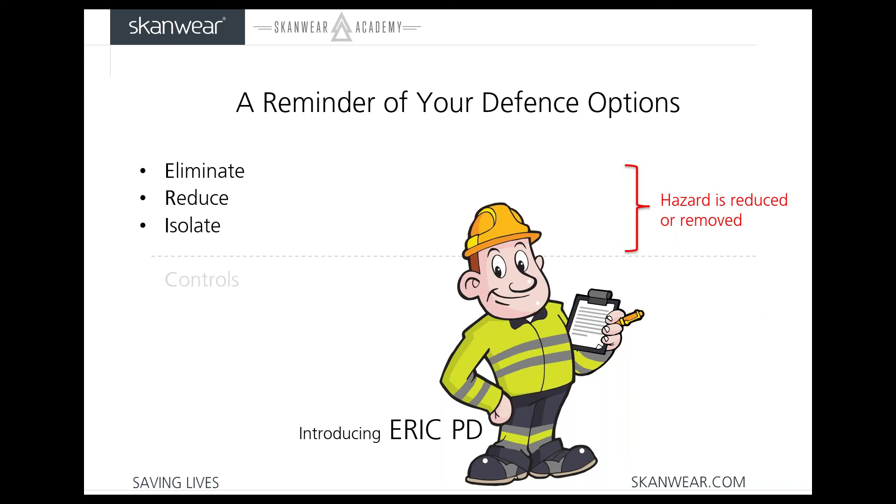And there's lots of evidence around to show that an association helps people remember, and having a mascot around the site is always a good reminder to people: hey, don't forget your hierarchy of controls. So ERIC PD stands for Eliminate, Reduce, Isolate, Control, PPE and Discipline. So there you are, ERIC PD.

Yeah, and it's really important to stick to that hierarchy of controls when considering the hazards, as it acts as a reminder of your defences. I think it's all too easy to get sucked straight into PPE, safe systems of work and training, but it's just clearly not the best way forward. Absolutely true. The higher the control, the stronger and more reliable that control is. So preferably, wherever reasonably practical, we have to use these measures.

The reason that the first three are more effective is because they're examples of safe place strategies, whereas the last three are safe person strategies. So let's quickly run through ERIC PD starting from the top. So E is to eliminate, where the job is redesigned so as to remove the hazard completely. It's usually started at the design phase of the project by providing the proper technology.

So if hazard elimination is not successful or practicable, then the next control measure is reduce or substitute. And a good example would be to reduce the incident energy exposure. So we measure the voltage or the current further downstream where there's less energy available.

And if there's no suitable practical replacement or substitution, then the next control measure is isolation. And this is simply, as the name says, physically separating the hazard from the operator or introducing engineering controls using additional machinery. And with electricity, for argument's sake, we could actually introduce remote switching.

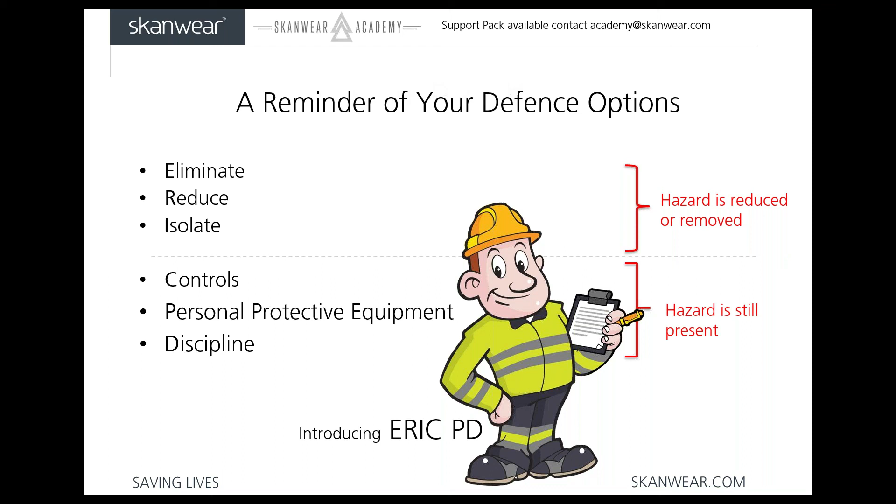So now you might be wondering, why should I bother? In the last Academy session, we showed the devastating effects an arc flash can have as we watched the survivor video of Donnie Johnson, who almost died in an arc flash blast. Yeah, that's right, Lorna. The injuries can be life-changing, both physically and mentally, and the healing time can be months, even years. So, to recap very briefly the effects of an arc flash.

An arc flash is an event, it really is a violent event that can cause destruction of the equipment it is involved in, fire, injury, death, not only to the worker, but to anyone else who's standing nearby. So what we have is a fireball with temperatures of 19,500 degrees, which will burn 10 feet away. And remember, it rolls around you. It's a 360 experience. It's not just coming at you from the front.

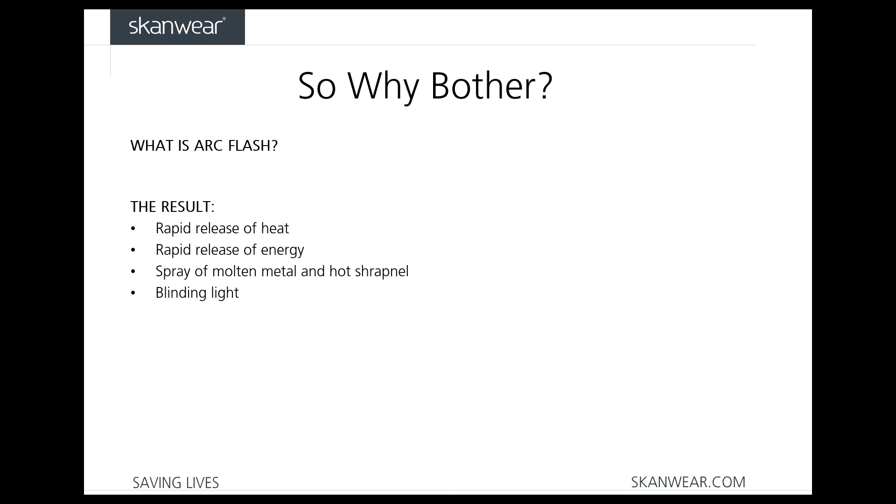And then we have the ejection, a plasma ball of copper vapor and droplets, hot shrapnel, for example, bolt heads and rivets. And then we have the intense bright light, hence the importance of the visor to block the UV light. The blast is upwards of 2,000 pounds a square foot, and it will definitely blow you off your feet. And if you happen to be on a ladder, it will blow you off the ladder. Absolutely no doubt about it.

And the noise, again, it's got 140 decibels. It's like standing next to a gun going off. And the resultant outcome of that is second and third degree burns, vaporization of digits, amputation of hands and fingers, blindness, possible deafness, and very severe debilitating injuries, and possibly even death.

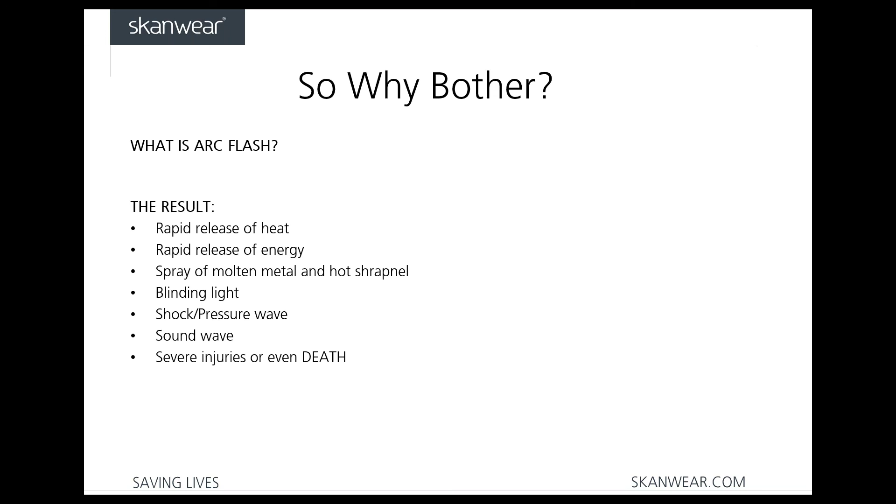Which is really quite scary when you look at those and you realise how quickly these can happen and just how eye-opening they are. Graham, can you tell us what the basic common sense precautions are that we should be considering when getting prepared for work? Certainly, and this is what a lot of people don't actually look at. So we're going to start off.

So only wear natural fibres next to the skin. Man-made fibres will melt into your skin, and again, I've seen this happen, and it's not very pleasant. So all clothing needs to be loose-fitting, and this gives the added benefit of extra insulation. And the next point is always very, very emotive. So it's no jewellery of any kind whatsoever, and I really mean that, period.

So that means no rings, no watches, no necklaces, no body piercings, no metal belts or buckles, no metal rimmed glasses, and ladies, if you're working, no underwire bras or fastenings. And the reason is very, very simple. Any metal will heat up very quickly and cool down very slowly. And the skin can basically melt around onto the metal. It's very painful, and that jewellery will very likely have to be surgically removed. And again, I've seen this, and it's not a pleasant experience.

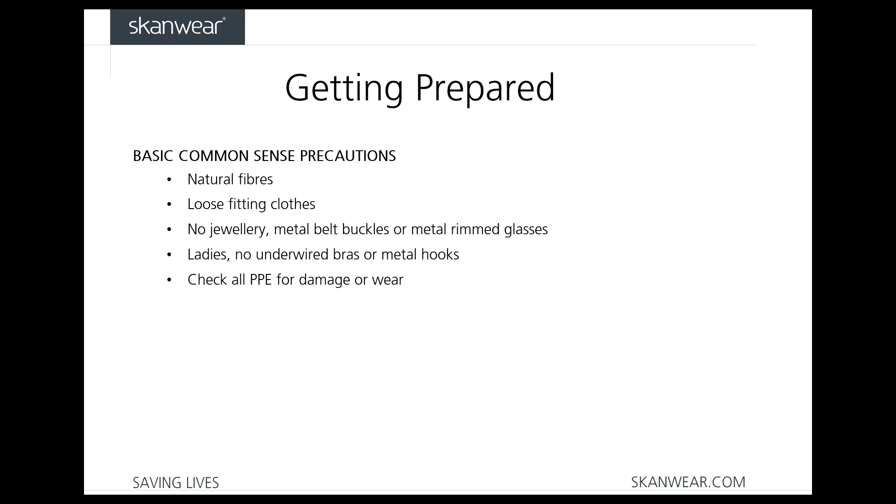Next, we've always got to check our PPE very, very carefully before using it. Don't be tempted to wear damaged kit. And finally, please don't get mixed up between flame-resistant and arc clothing. Do you think we could just chat through what the differences actually are? Am I right in thinking that all arc-rated clothing is flame-resistant, but not all flame-resistant clothing is arc-rated?

That's actually spot on. As the name implies, arc-rated clothing fabric is subjected to a series of arc flashes to determine how much energy it can block before it's likely to cause the wearer a second-degree burn 50% of the time. And this amount is known as the arc thermal protective value, the ATPV. And the ATPV is measured in calories of heat energy per square centimetre. And the higher the arc rating value, the greater the protection.

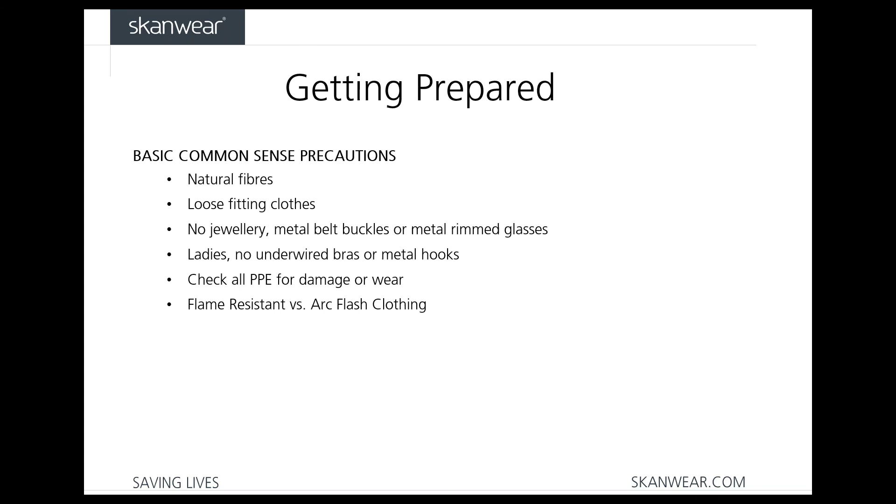So this makes the difference between arc rated versus flame resistant clothing clear. Clothing rated as flame resistant may not provide sufficient protection for workers in environments where an arc flash hazard exists. To me, it seems easy to see how all this could be quite confusing for people, but obviously it is essential that we all know exactly what our requirements are for the specific job. So speaking of requirements, I'm going to move on now to see what they actually are.

So it's a full suit we have here. So the head needs to be covered, and if you have facial hair or long hair, it needs to be protected. And if you wear nets, then they have to be arc rated as well.

The eyes: we need both safety glasses and a face shield, and the face shield is primarily to protect the wearer against UV. On the hearing front, we need specialist earplugs to cope with the extreme loud noise. And the body: the clothing needs to be worn correctly. There should be no gaps.

Recently I went to a conference where the medics were explaining how an arc flash had got inside a suit and it couldn't get out, and it caused the guy extreme burns. Then moving on to the hands and arms, we need to make sure we're wearing insulated gloves to protect from the electric shock, and then outer leather gloves to protect from the flames.

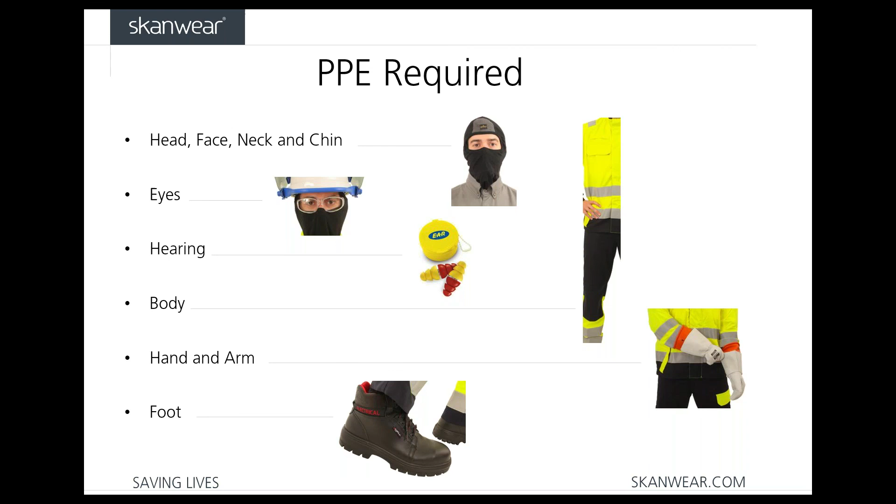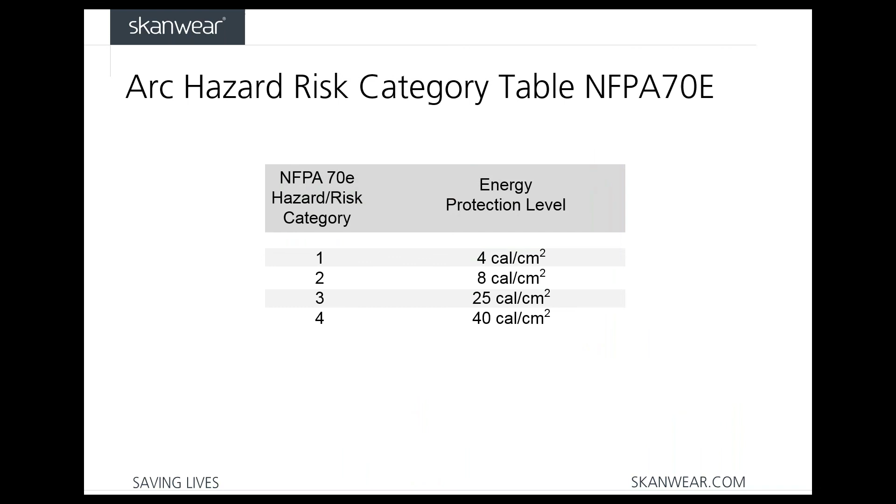So moving on to the next layer now. I think this is actually a really smart, totally realistic outfit to wear throughout the day. Because it's made from arc-resistant material, you'll know that you'll be protected. And how will you know that for sure? Because we display it in plain sight. Any clothing that you see with that red and white A logo is from our Strata brand, which is only available from Skanwear.

Yeah, I agree. I've said it time and time again. I like to see how easily you can recognise what level of protection people are actually wearing, and with this it stands out a mile. Exactly. So instead of that collared shirt, we'll just show you another option that you can wear. Let's just have a look.

So we've got a long-sleeved t-shirt, which is a fine base layer. And layering up with all of our Strata garments is just not a problem, as the product design team here makes sure that all the fabrics are lightweight and inherent. Again, as we've mentioned, on all the clothes the category rating is right there for you to see, so there never needs to be any question of, am I protected?

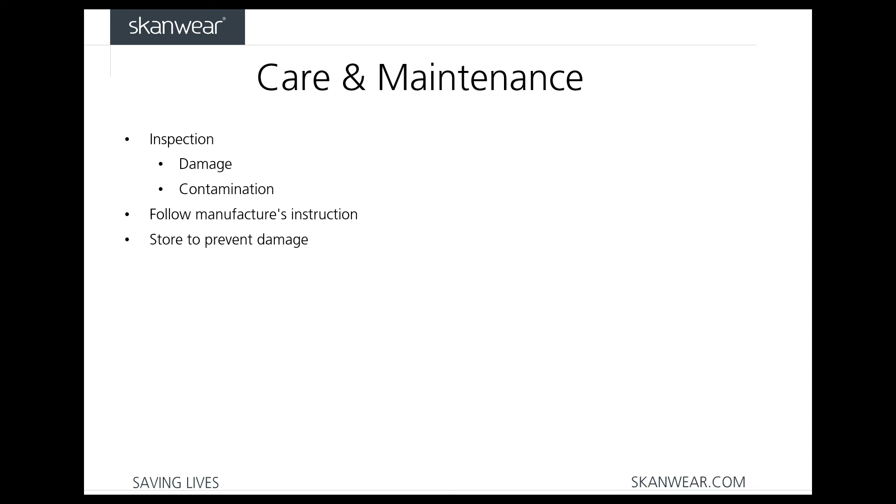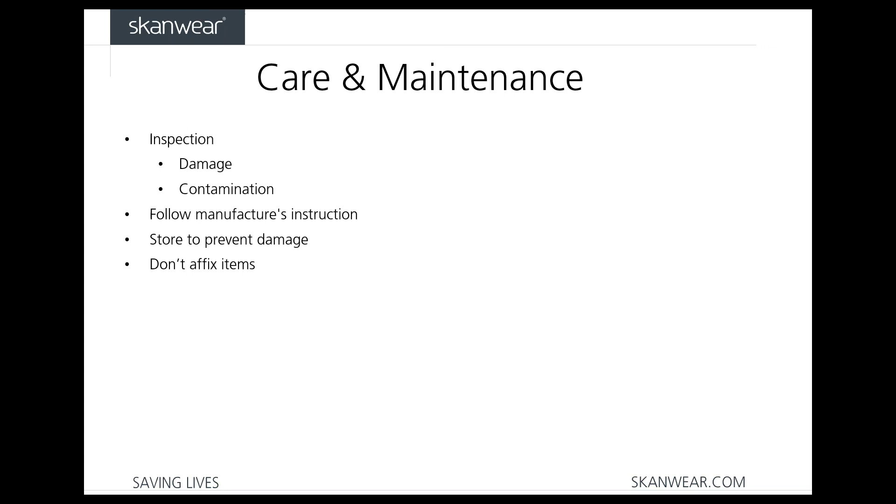And then we need to make sure that we don't affix badges. They won't be of the same material as your suit. They will fail, they'll catch fire, and they could affect your clothing protection and possibly put you in harm's way. Which, you know, we'll all agree that it's very important to remember those things that probably people do forget about.